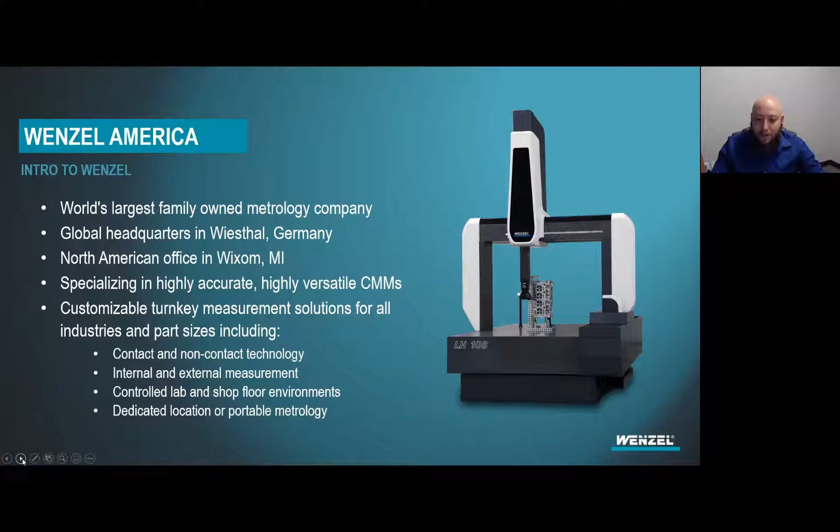Absolutely. I know working with Mariano the last few weeks directly, he is truly an expert in this 5-axis system. I've learned a lot, so hopefully you guys can take something away from this and learn a lot today too.

So a brief touch on the agenda and everything we're going to go over today. We're going to show you how this 5-axis system can help you streamline your planning, create a speedy setup, a rapid inspection, faster changeover, process-driven reporting, and then Steve's going to come back and touch on the cost justification and return on investment. With that being said, I think we're ready to get started. Mariano, if you want to take over.

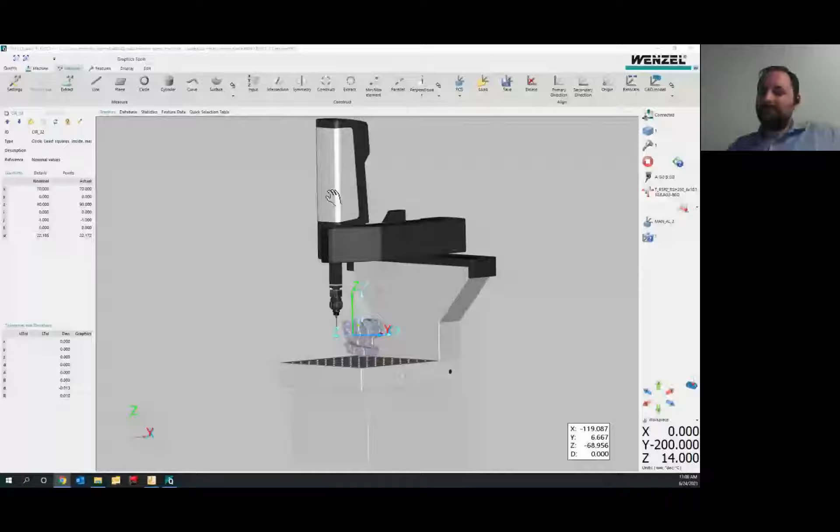Yeah, let me go ahead and share my screen here. There we go. All right, so here we have a little bit of an intro to the WENZEL software. You can kind of see how Quartis is laid out. But Mariano, how can a 5-axis system help you streamline your planning process?

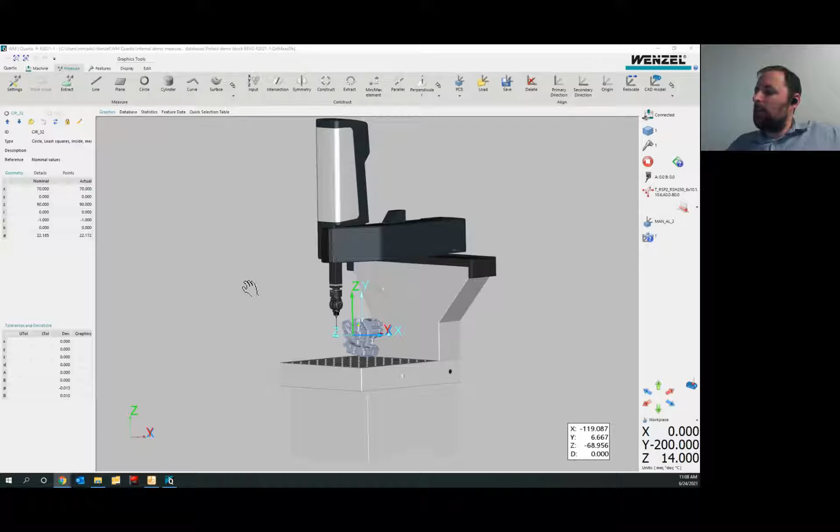Yeah, so let me show you a little bit about our Quartis software we have set up, demonstrating our shop floor CMM over here. I have this demo block that we use for a lot of our demos, and it's the quintessential block for 5-axis systems, because as you can see, it's got a bunch of holes and elements on all sides. And so we have the Revo 2 here that I'm also simulating. Like you mentioned, for 3-axis systems you have an articulating head with both A and B angles, whereas this Revo 2 head has infinitely indexing angles. So you can choose whatever angle you want — if you want 23.978 degrees in A and 90.258 in B, you got it.

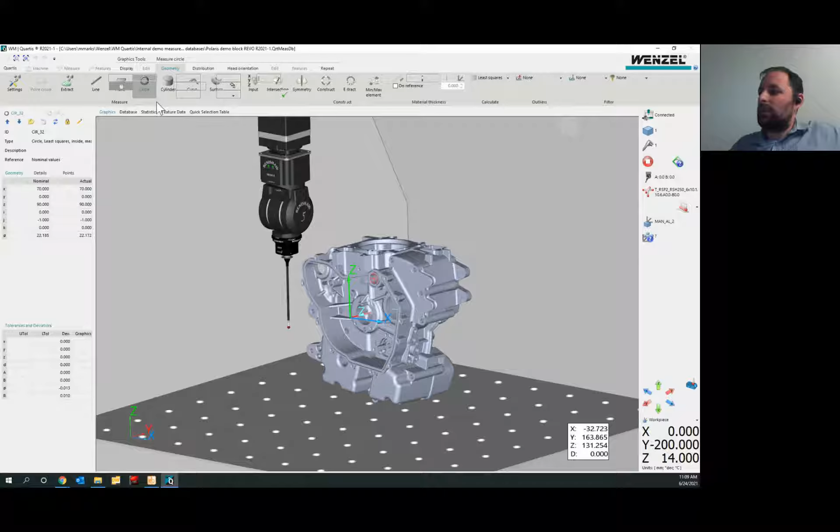With a traditional 3-axis system, you have to essentially be mindful of every particular angle and approach or intermediate point — you have to think about where you just came from and where you're going to go. With the 5-axis system, it's a little simpler. Let me show you over here — I'm going to just measure this very simple circle. I left-click once, right-click once, and leave the default settings. I'm just going to go ahead and hit start. All right, so you can see immediately the head orients itself and goes to measure my circle.

Now I'm a proud owner of this circle. Boom. Really quick measurement. Here I just gathered 2,900 points just on this small circle with this stylus.

Right, so this is as easy as it gets. Essentially the controller of the CMM is taking care of you a lot. There is less for you to think about when programming, which leads to less errors, less crashing, and things like that.

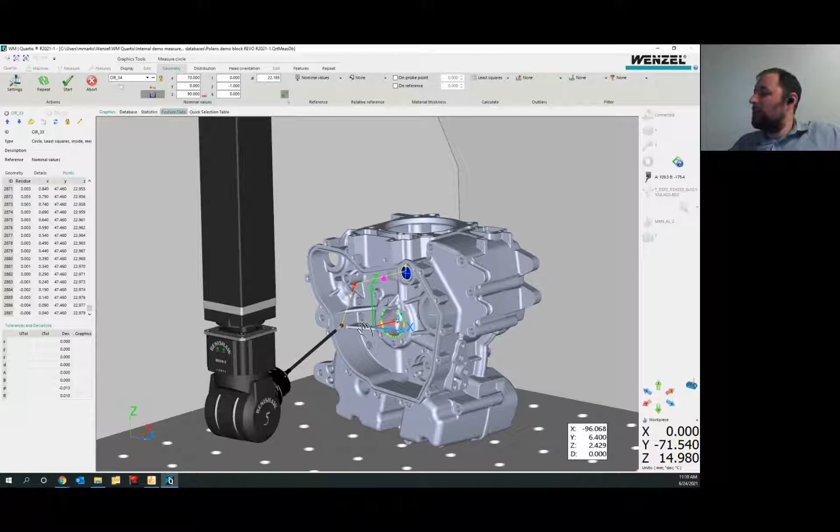Let me go ahead and show you one more time with another circle. I'm just going to left-click it once, right-click once, one more time. You can see immediately the path it's going to take. It's pretty clear, and I actually already had this setting here. Very minimal things that you can change here in the ribbon of our software.

So I have it set to this focal point, for example, this purple point right here, which I'll just go ahead and click start and let it do its thing. You'll see that it's going to move in such a way that it's going to orbit around that purple point. This is great if you want to get an undercut or something like that. You don't have to change your probes or anything, so this allows you to approach things much more quickly.

So all of this rigorous planning is streamlined with the 5-axis and our Quartis software. That's awesome.

My next question goes back to what happens when the part is moved a little bit. So you had said it needs to be at 92.5 degrees or whatever. What happens if it's at 94 or your part just isn't lined up perfectly? How does the 5-axis system help you accommodate those little bits of imperfection?

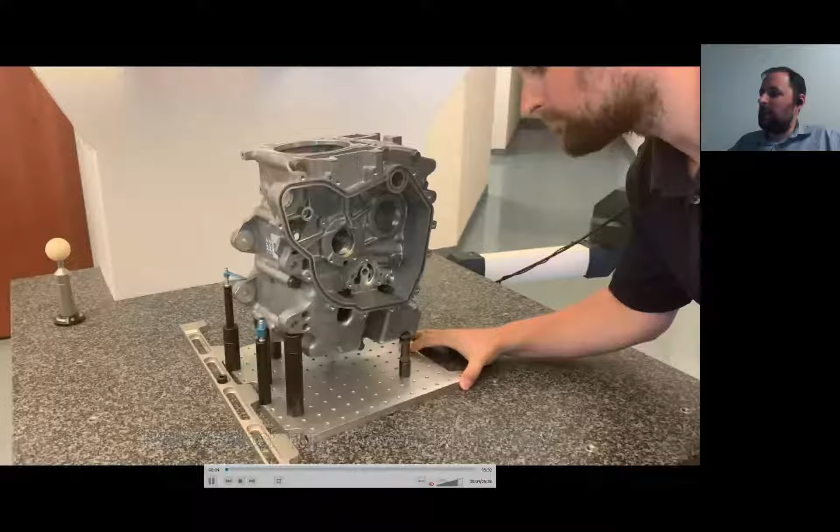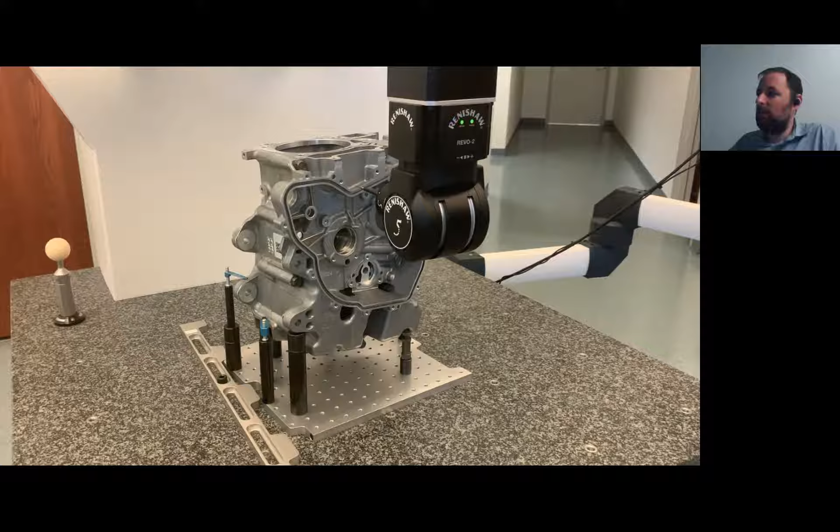Yeah, so actually very little at all. What I have here is that very same block, and what I did is I just tilted it a little bit from our magnetic fixture that we have here, to simulate an operator that perhaps sets the part up a little skewed. Not purposely, but it happens. So after the operator manually aligns it and finds the part, the CMM has its eyes closed, as I like to say.

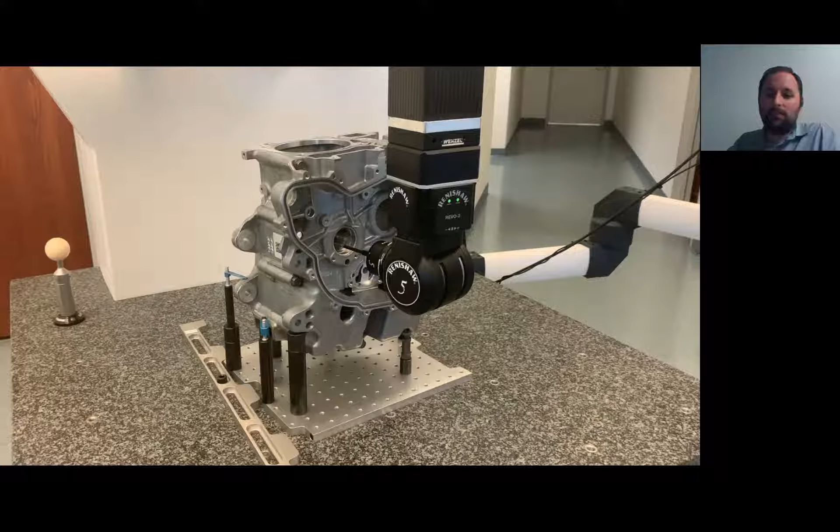After you have that, I'll go ahead and go to the measurement part. You'll see that the Revo head is just going to measure your part still the same, because the controller takes care of you. I had to do no inputting or changing of any angles in the software. The A and B angles adjust automatically to optimally measure all of your elements. These are called Euler angles, and it makes your measuring that much quicker. You don't have to worry about these types of things.

I know we have a WENZEL with a PH20 here, and this has helped us out so much. Traditional CMMs with a 3-axis system, you have to move it away, and if your part is not perfectly lined up, you don't have that probe that's going to be able to get in there perfectly. So if you don't have the right angle probe, you're going to get some errors on your part. Having this, being able to have infinite angles and move according to how your part is aligned, is going to save you time, save you errors. It's extremely helpful and beneficial to just being able to have that at one touch.

So can you explain to us how a 5-axis probing system is going to help increase your throughput? Yeah, essentially you can see that this Revo system is going to be able to measure more parts faster with more data. This is going to be a time savings for you guys, which equals a dollar savings, which is what Steve is going to bring this point home a little later. But essentially, all of this more data equals a better analysis and a better picture of the quality of your parts.

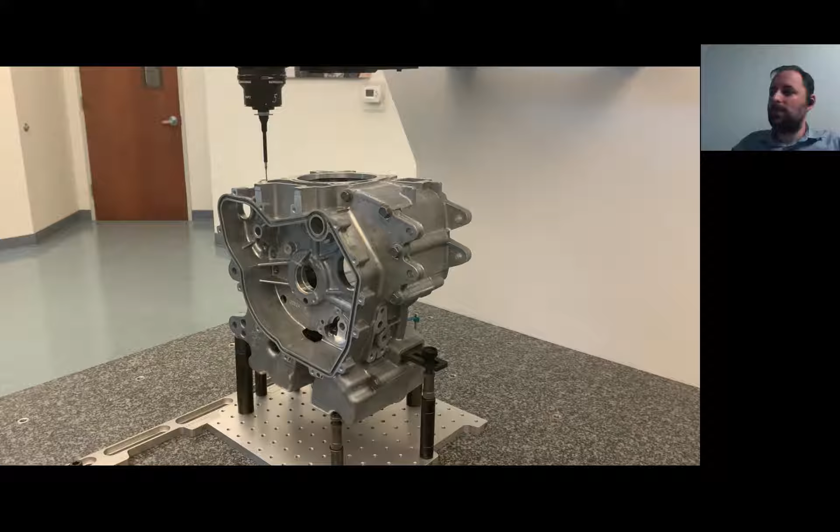A little bit about how the Revo takes care of this. There's actually a laser inside of this head that goes down the extension of this carbon fiber extension that you see here, and from the bending of the stylus, it's going to be able to determine with a little mirror in there and gather points very quickly.

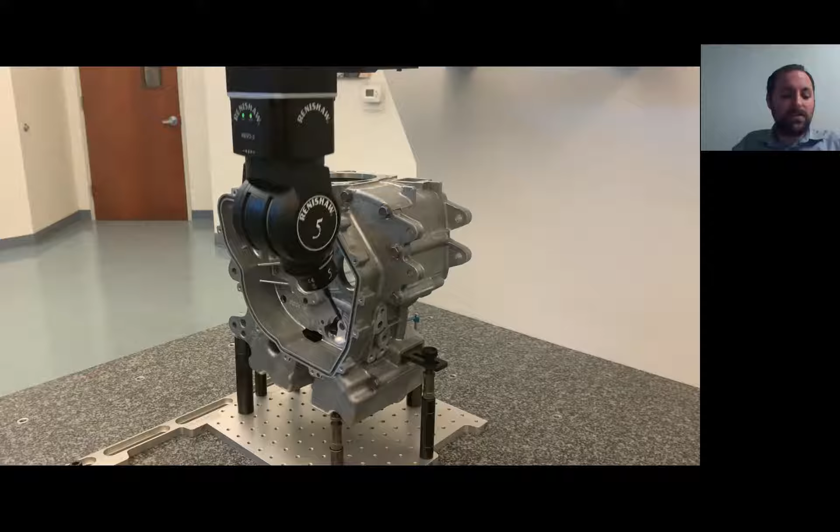Maximum 4,000 points per second. Inside of the head, in the A and B angles, there's encoders. I like to say there's a little CMM in there for you that does all of this work. With this technology, it's able to do all of these moves and do 5-axis sweep scanning as well, as you will see. So you can sweep scan your planes, your cylinders, and your freeform surfaces.

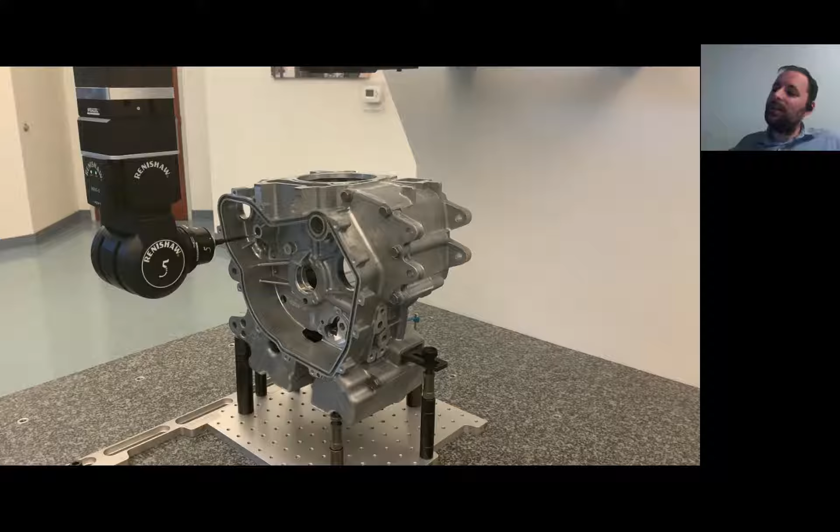And then all of this effectively increases the size of your CMM, right? I'm able to fit a larger part into the CMM because, with a traditional 3-axis system, you have to be mindful of moving away, rotating, going down, and then into the part. Whereas with the 5-axis system, you can swoop into your part, so as it's going down in Z, it can go inside of your bores and other elements to inspect them.

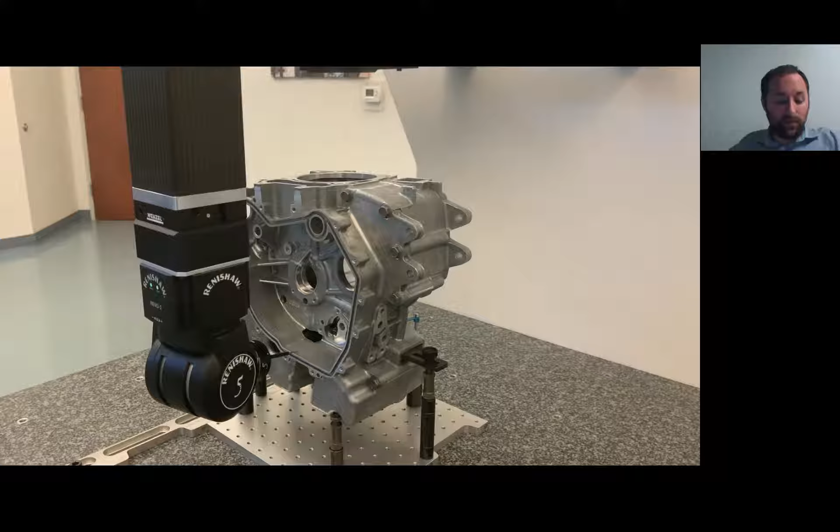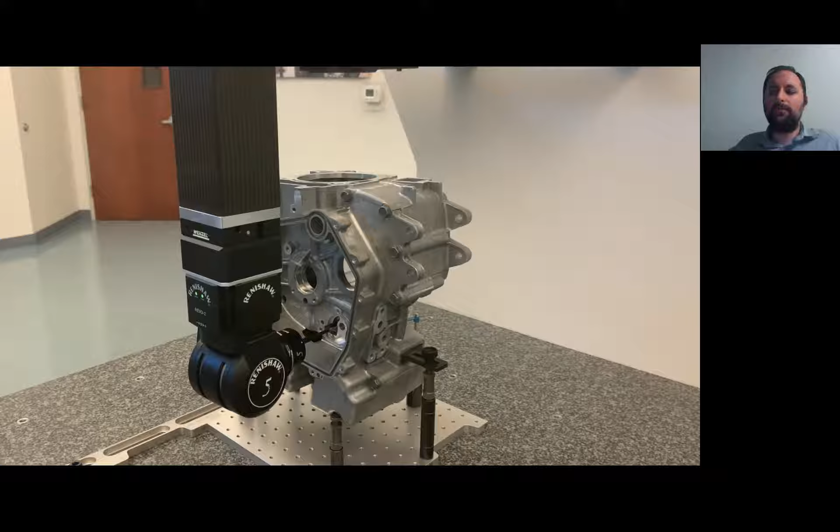We're actually actively working on a speed comparison with this very part between the Revo and the SP25 system, and we expect a time difference in inspection of around 3 times, so pretty significant.

Yeah, absolutely. Speed is money. The more parts you can get in and inspect in a quicker amount of time, the more parts you can get on. It's self-explanatory. The more money you can save, it's going to make your machine that much worth it.

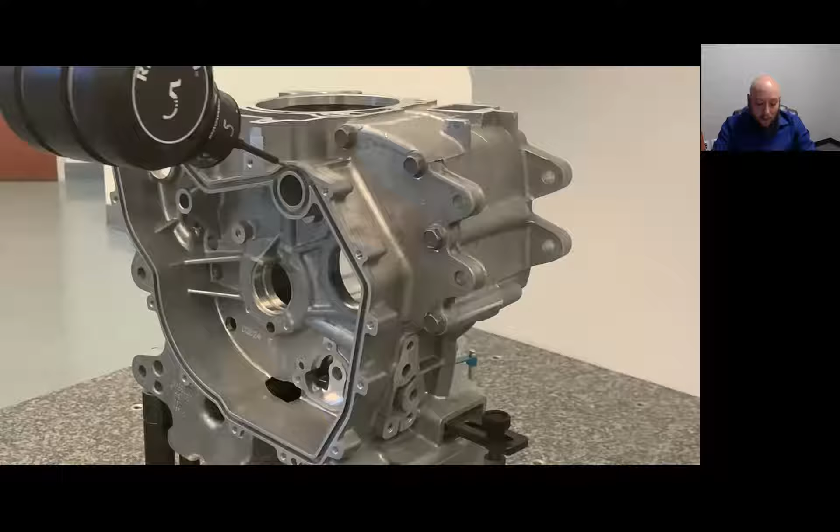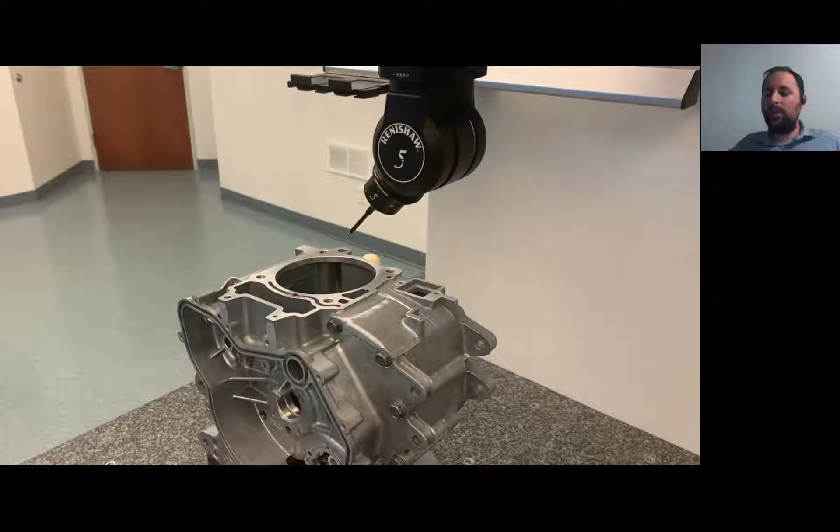So can you explain how a 5-axis system can help you do more with less? Yeah, the Revo is for throughput, right? One great example is that for all of those infinitely indexing angles, I don't need to qualify each individual angle. With one calibration procedure for this stylus, I'm ready to just rock and roll and use any of those angles.

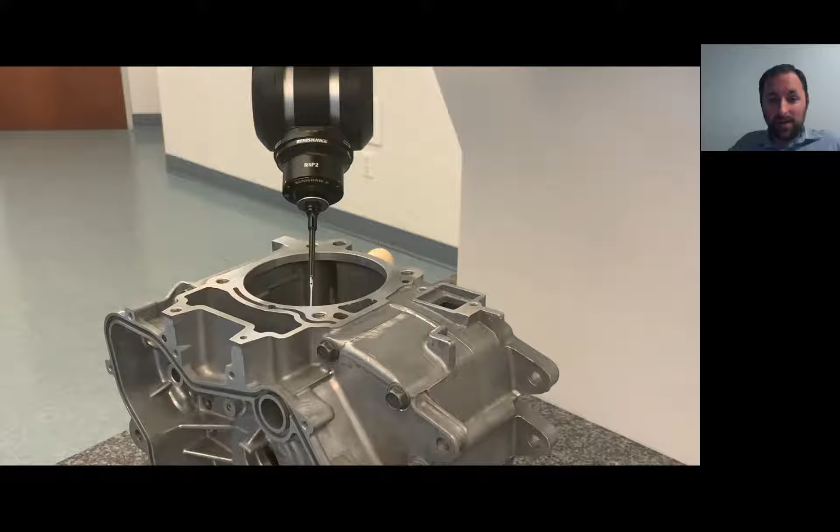With this RSP2 5-axis system, and RSP3, you can measure with extensions up to 800 millimeters long, so you don't have to worry about not being able to reach into your part. These are massive probes that the Revo is able to handle.

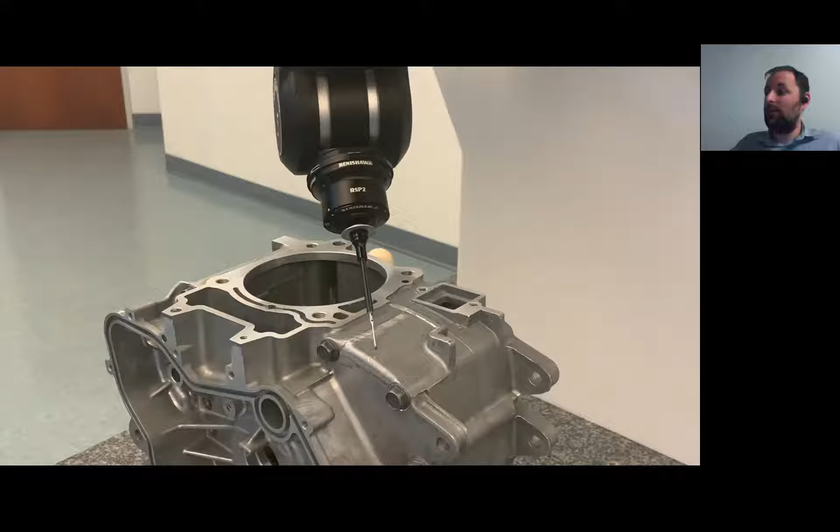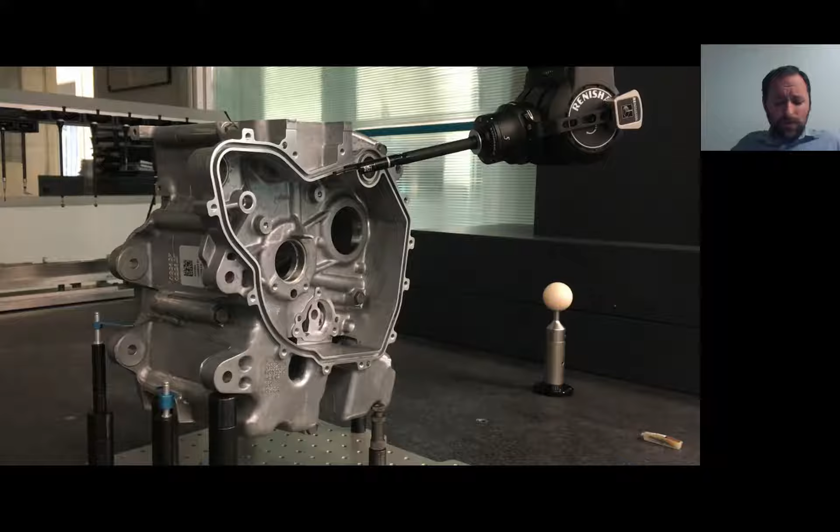Another thing you're able to do with the Revo 2 and Revo 1 systems is add a roughness probe on here. We're also able to measure on the front face of our block with the roughness probe. So if your stylus changes, you might go from one stylus to the roughness probe, or even a camera system on the head of the Revo 2.

This means you essentially don't have to take your part to another machine, waste time doing that, and then have a second report. The idea is that you have one machine, one sensor, and one solution for your inspection department. That's awesome - not having to move your part, take it somewhere else to take measurements, you can have everything all in one spot. Looks nice to the customer and really helps your inspection process.

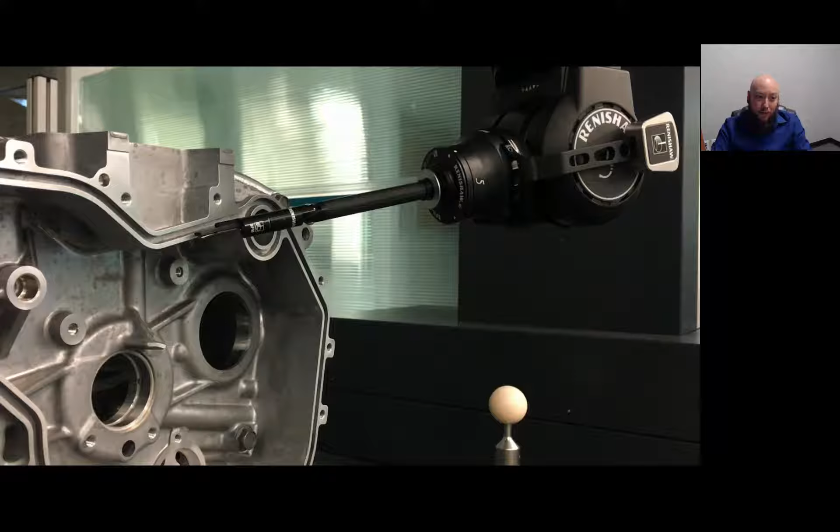So you've explained how you can get all this data. We've scanned things super fast, we've gotten all this data. What do we do with it now?

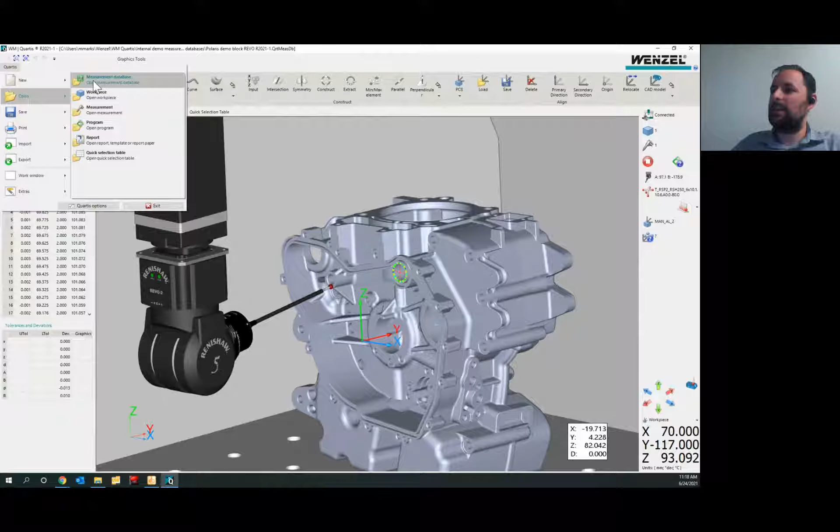Let me go ahead and show you here in Quartis. I have this sample measurement database, which I think is really awesome and neat, where with the speed of the Revo in software like Quartis, we can capture every single run and analyze these inspections with SPC, statistical process control.

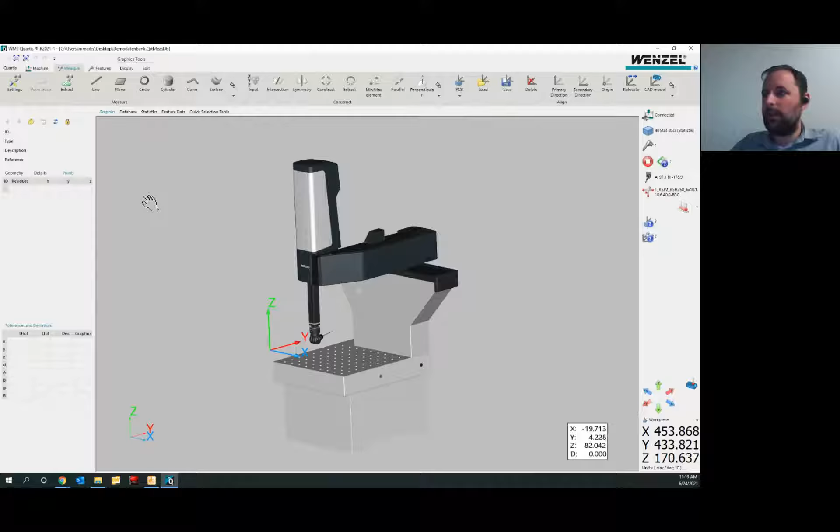So this is going to tell us a story about our production process. Am I over-tightening a 3-jaw chuck? Was there a tool change or something like that? What I have here is a workpiece with no programs, no CAD or anything like that - this is just to demonstrate these 305 runs. I'm not sure if the data is real or not, but I love that we can showcase that story of your part.

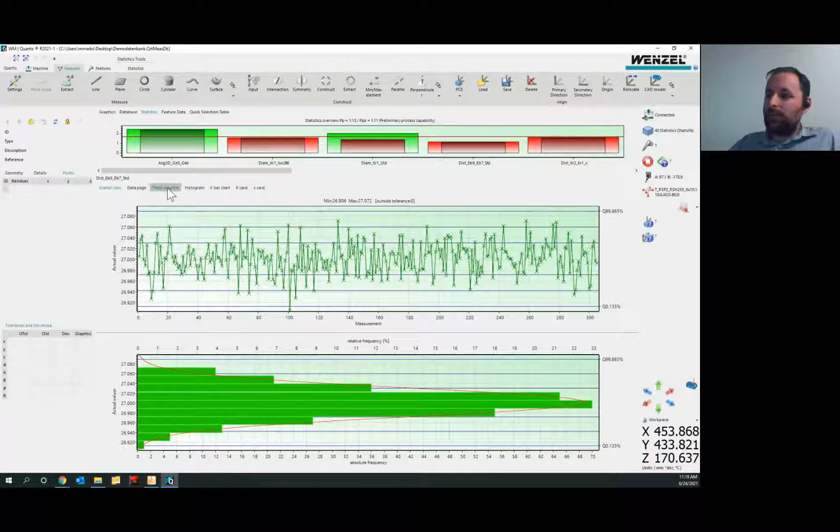You can see here for each of the features or characteristics - I have an angle, a diameter, another diameter, maybe a flatness - for all of these 305 runs, it shows me the history. From here, I'm able to take these trend diagrams and histograms and put them on a report. I have the data page where I'm able to do process capability studies and machine capability studies.

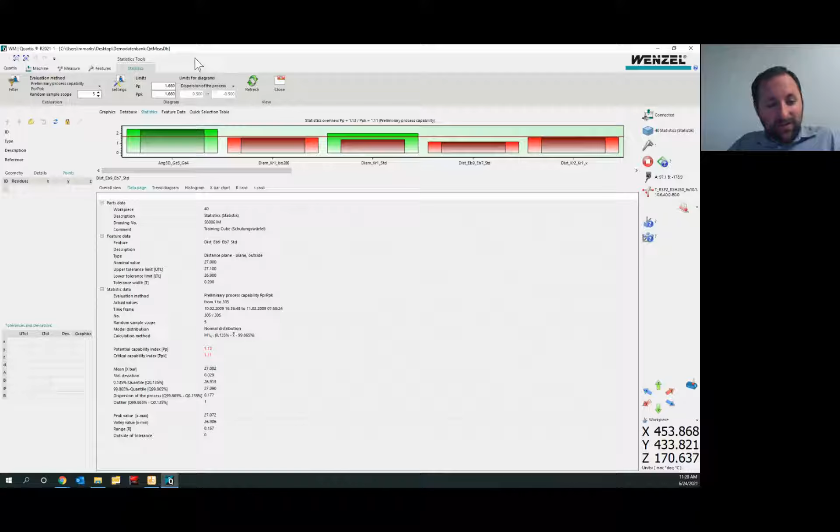I'm able to filter these runs so I can see the last 3, the ones done only last month, the ones that Jimmy did. So all of these errors you're able to catch, because the Revo gives you this data. This could save you days or weeks of chasing your tail trying to find where the failures in your parts are coming from.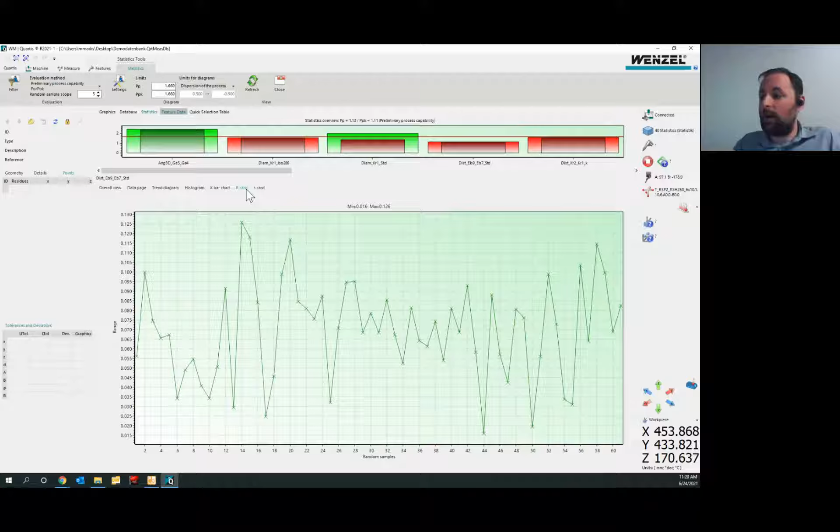It looks pretty. Having this SPC data all built into the software means that you don't necessarily have to pay for a secondary SPC software.

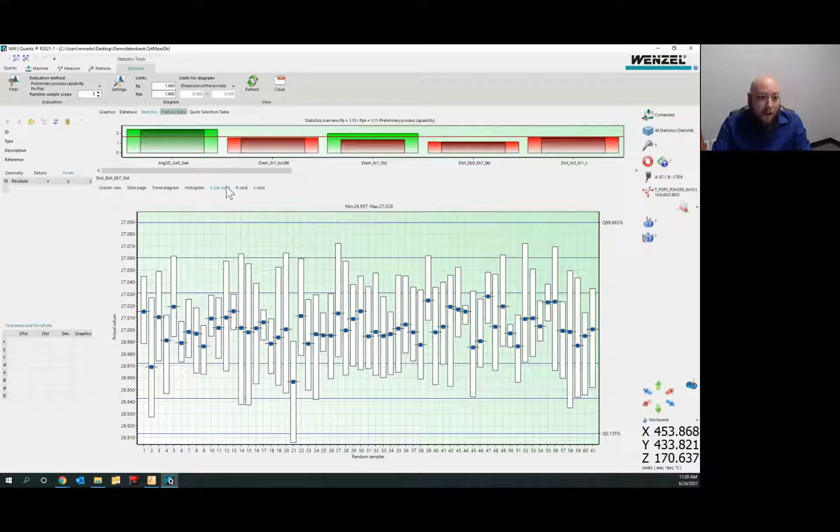Yeah, why wouldn't you want to see the results coming from your part? Customers love to see graphs, diagrams, and charts. Being able to put all of that together with the thousands and thousands of points of data you can get speaks volumes to how powerful the software is and how powerful this Revo 5-axis head is.

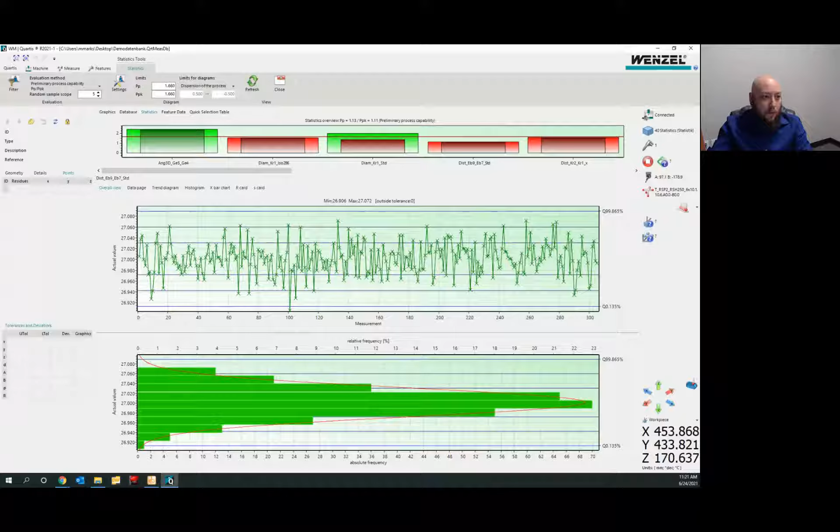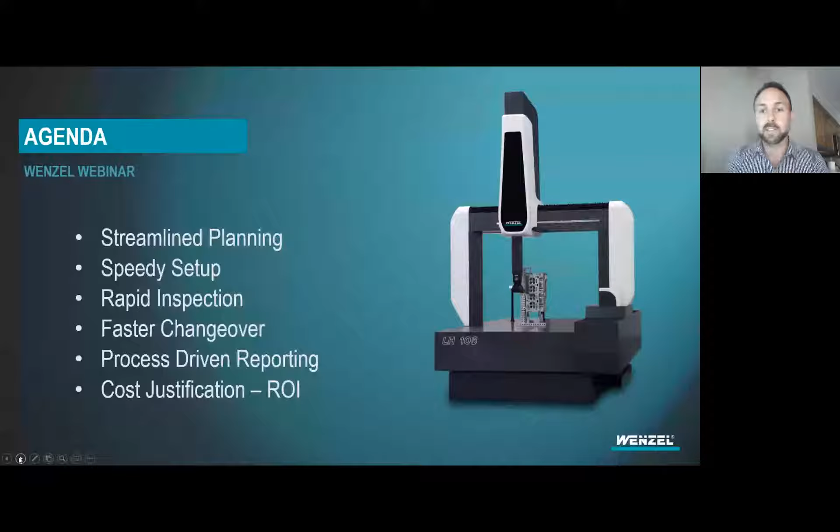So we just learned about some advantages of the 5-axis system, but I want to spend the next 5 minutes or so looking at what this all means for you from a numbers perspective. How does this impact your P&L? Why is 5-axis measurement important for your team, and more importantly, your customers?

Apologies in advance, I realize this slide is a little busy, but don't worry about reading all the bullets independently, I'll cover the important stuff. Ultimately, this section is just a piece of our cost justification sheet. This is a real life example of a longtime WENZEL customer who just purchased their 4th machine, their 2nd with Revo.

So what we're looking at is an apples to apples comparison of the same exact part being measured on two different measuring platforms, one with the 3-axis PH10 SP25 and the other with the 5-axis Revo, like Mariano was showing us earlier.

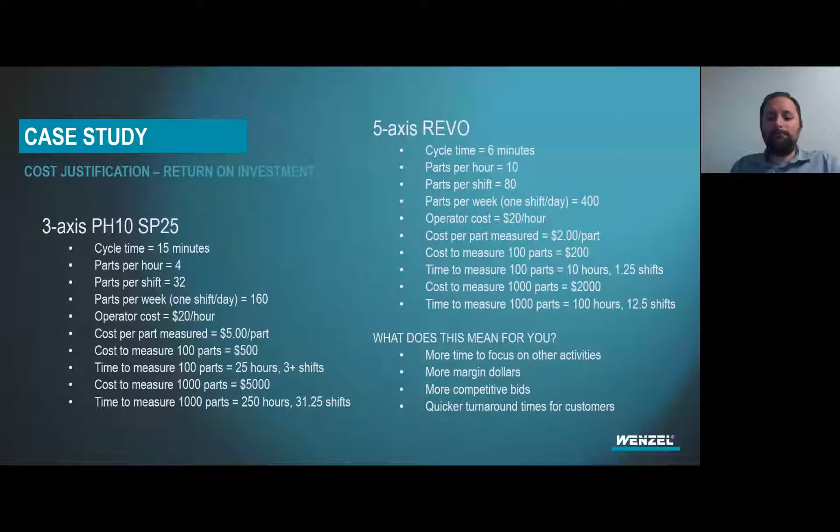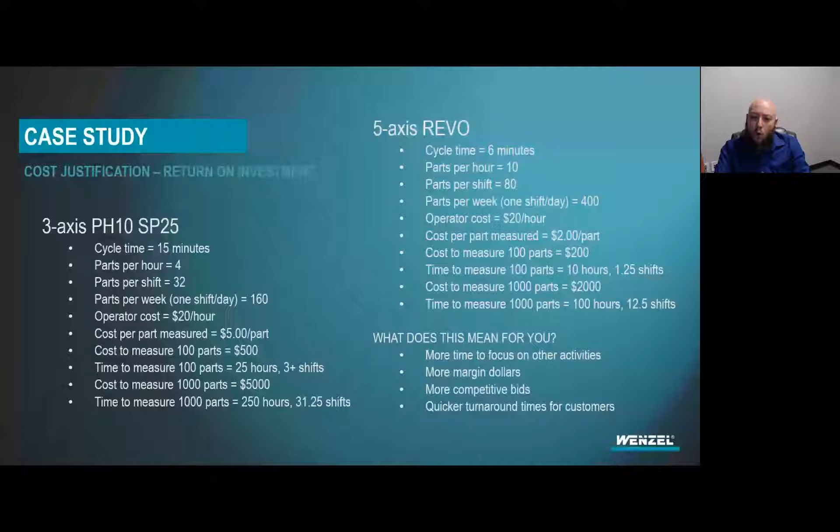Last question that I see popped up on the Q&A: what kind of support can you expect if purchasing a WENZEL CMM? Any other words on why would you purchase a WENZEL over another company? I was going to add my first thoughts on this, and then Steve, you can add everything else that I missed. Like you always save me.

What I was going to say is about our support hotline right now. If you call in, we have a multitude of our application engineers, myself included, ready to assist you. Or if you leave a voicemail, it goes into our email support inbox, or you can email us directly. That's going to ensure the fastest response time.

I'm on a texting basis with some of my customers, so if they need help really quick, I'm available. I've also been able to troubleshoot some service things, getting my foot into the service world, which is really awesome to tie in both the apps and service side. I've been able to FaceTime with customers.

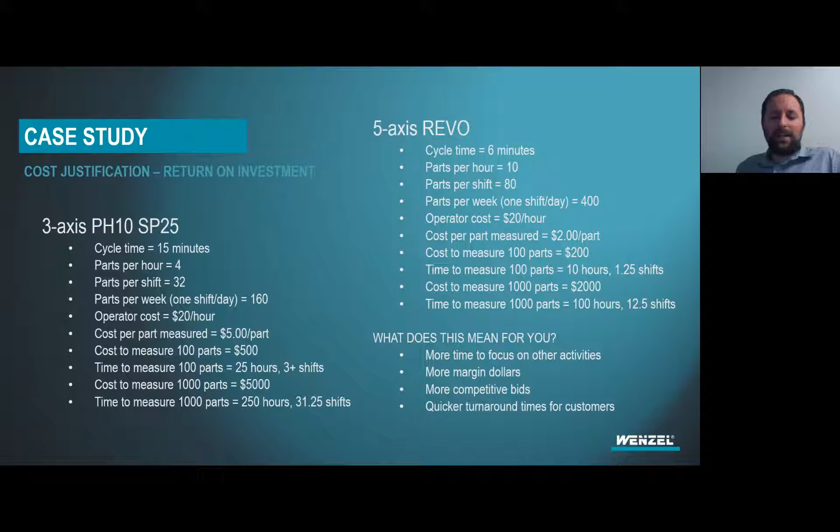On top of that, like I show on these machines I have here in front of me, look, this is what you're looking for. Here's your air regulator, here's your belts, here's how you take off the cover. So we assist with all of that. We love that flexibility. We want to make it successful. That's kind of my bit about our support right now.

I don't know if Steve, you wanted to add anything else to that? I think you pretty much nailed it down, right? Two big points that I always like to focus on is what kind of support, right? Mariano kind of mentioned it, right?

Just like Fox, we're a family-oriented business. Our values align very well with Fox's in the sense that when you call, you're not getting hundreds of people on the hotline who don't understand your problems, where you have to go through everything new. You get familiar names, familiar faces who are very familiar with your challenges and what's going on. So everything's relatable and personable. That's one pro of working with WENZEL.

The other thing is flexibility, right? Another word you used, Mariano, well done there. I can't drive that home enough. Flexibility is a big piece of WENZEL, whether it be from our equipment and offerings, our measuring solutions, flexible probing options, flexible software, to the service side too, where unlike some other folks in the industry, WENZEL's not going to tie you down and say you have to use us for calibration or service. There are other people, much like Fox Valley, right? Fox Valley can come in and take care of you guys, get you where you need to be. That's just part of our process and how we go to market.

So if you have any further questions or want to talk about this kind of thing in more detail, we'd love to reach out to you. Hopefully that answers your question, but feel free to connect after this if we can get in more depth.